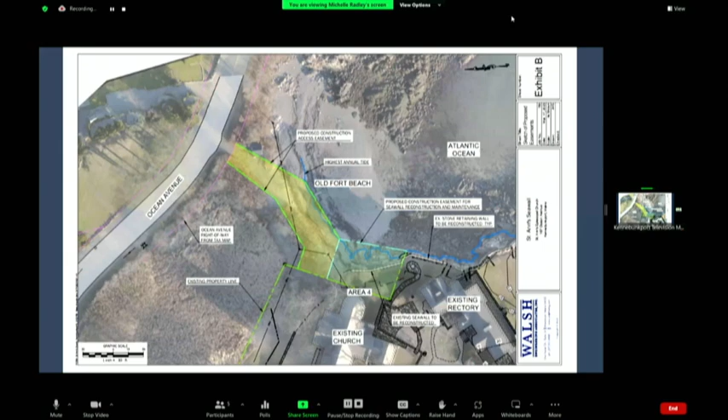This green line represents the property line that's there. So that's where the wall is forward of that as we're looking at this, and you can see where that bisects the wall on the left, and then it circles around the back of the church. I suspect when they built this, they probably didn't know where the property lines were, and they built it to protect the church, or the backside of the church.

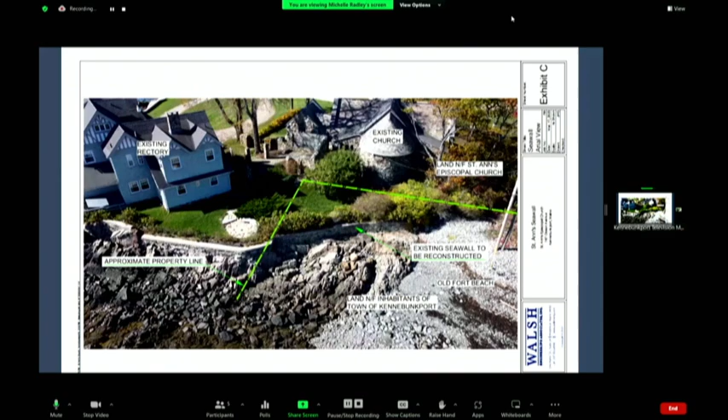This is the wall. The rectory is in the upper left of the picture, and the wall extends to the left. The entrance would be off to the left of this photo, so this is a drone image that we took, but you can see that wall.

It's a masonry wall, and I believe it was built off of rocks that they pulled right off the shoreline, and just mortared them together. At some point, a concrete cap was put on it.

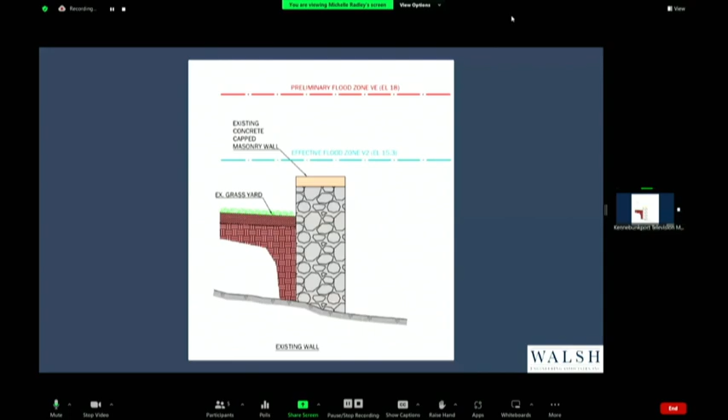Okay, you can go to the next one, please. Yep, one more.

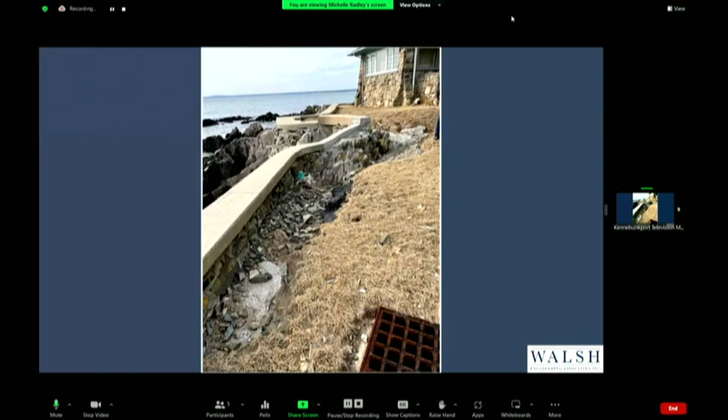There's another one. That's some of the drainage that existed behind that wall. Towards the end of that pipe, there's actually a hole in the wall where it washed out in that storm event. This was just after that storm.

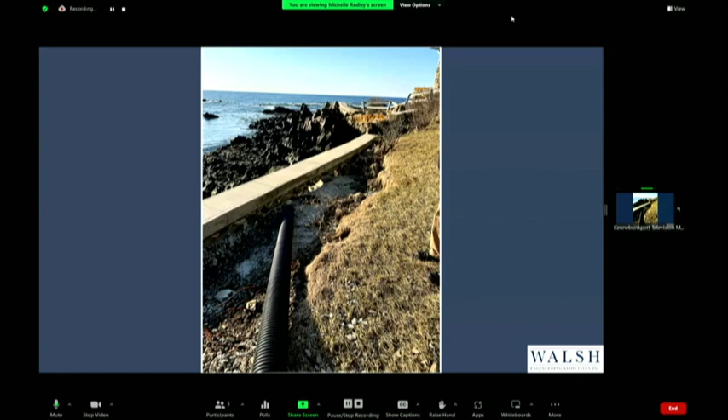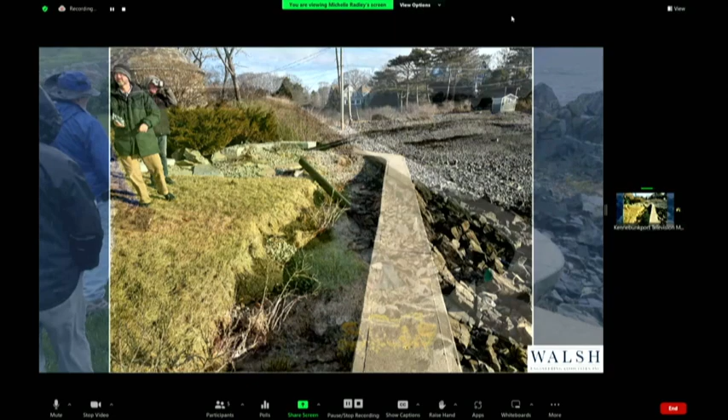And that is the area. The church is just to the left, and you're looking at the beach, but you can see all of the erosion and the pipes that were ripped out as part of this storm. It shows the force of that water as it comes up and over, eroding the backside as well. Some more washout there.

There are a few places where we're likely to put in some riprap to help break the velocities of the water before they hit the wall, primarily around that spot near the rectory, that one corner. There's a very low spot there, and I think it makes sense to put in riprap in those places to help protect the wall even better. The wall will do the protection, but this helps to break the storm up a little bit.

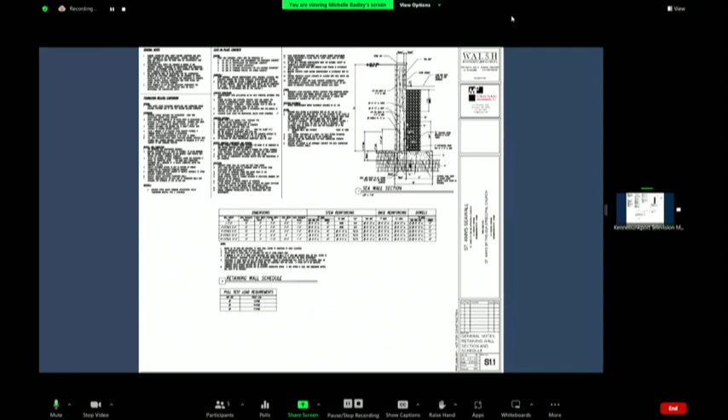The plan on the right represents the same thing, just a little more graphically, but it will have what we call a heel on it, the piece on the back. What we anticipate, and what we've done on other projects, is they get in there, use a hammer, and hammer out the ledge to create a flat base for the footing. That footing is the horizontal piece, and it will be drilled down into the ledge, epoxied into the ledge and held in place that way. The yellow is the concrete core, and there's structural steel in this to make sure it can withstand the velocities and forces beating on this wall.

Go to the next one, please. One more.

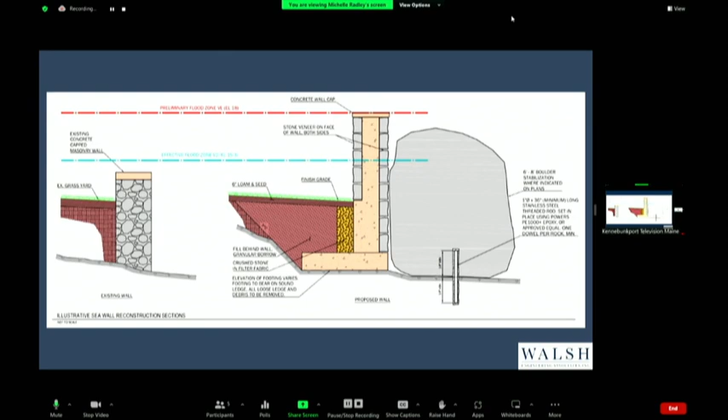There's a balance here, obviously, of views and protection. What occurred to me while watching your video was the effect of wave run-up and overtopping the wall. It seemed to me like if you only raise that wall 3 feet, you're still going to get overtopping for some of those waves. Yeah, absolutely, that's going to happen. And then you have your drain system, exactly, that's the idea.

I mean, we'd have to keep going up, right? Until we'd... Yeah, or you could change the shape, make it convex and reflect it back. But okay, so you thought about that in terms of the drainage system.

So on your riprap, can you characterize that with a D50 rock size? Some of those are gonna be in the 6 to 8 foot range. Well, how about tons, like 2.5 tons? Yeah, whatever that converts to, it's gotta be that. If I was just guessing, I'd guess it needs to be around 2.5 tons average. Okay.

If you go out to the parking area on the right where you drive in, you can see some stones that were put in there at one time, and they've been moved around. You're gonna get a lot of wave action in there, and you can see it on the jetty as well. The stones that went back in were bigger than the ones that were there, in the 6 or 8 foot range.

So could you characterize the riprap in terms of a D50 rock size? Yeah, it's 6 or 8 feet. What tons, weight? I don't know. I don't know that off the top of my head, but I'll get that for you.

The town property, isn't that on that picture on the upper side where there's less riprap and it's almost not a beach because it's all little stones? Isn't that where water could come up and come in behind? There's a, I don't know if you could bring that one back up, Michelle. Let's see how far it is in here. That's the town's liability.

Maybe about 5, that one works actually. So beyond that you see the church behind, actually it's behind Werner, he's standing there. The church is behind there. It actually drops off behind that. It's kind of a stone berm, I'll call it, and a marsh behind it.

So the area it will go is there, which is to the side of the church versus instead of coming up behind. The grade is higher back here where Werner's standing, so it's going to go that way before it comes this way. So the riprap, there won't be a demand on the town or a request? No, I think it'll be very much the same as it is today. It's going to be just the same. Thank you, yeah, taller, absolutely.

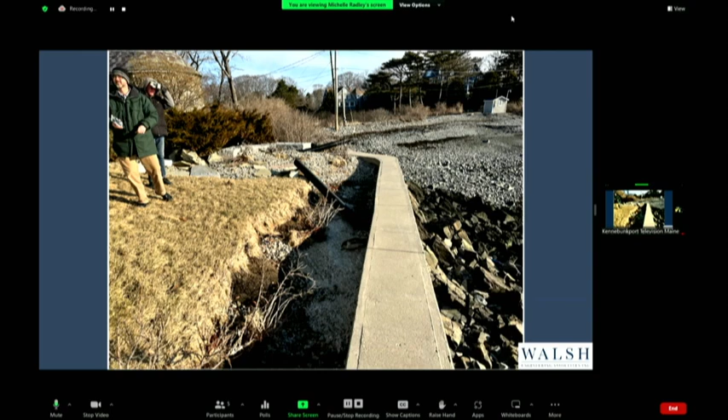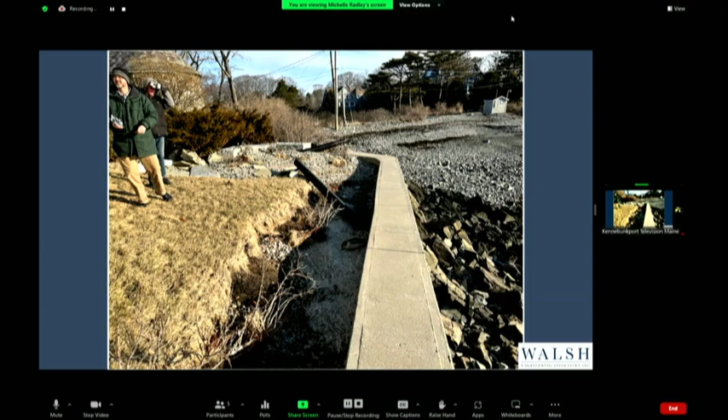Ed, do you have anything? Yeah, I was hoping to understand, just for my own edification, how you attack this problem. I'm envisioning back in the day when this was built, there was an awful lot of work, men on the ocean side, working with mortar. Do you know? I can envision bringing in heavy equipment up to it from the church side. What do you do on the outside, especially where it drops off quickly? What do you envision doing there? And how do you protect the ocean during construction?

So it will all be from the land side. We'll be working on land. What will happen is they'll bring in backhoes with hammers, we call them hydraulic hammers, and those will do the removal first, chipping away at the ledge. So you've got this 60-foot section, and now I got that cleared.

You're going to cart that away, I imagine? Yes, exactly. And then they'll build a flat platform over that 60 feet, it may be several, like they might have 20 feet at this elevation, they might step up a foot, but all toward the church side of the property? Yep. And then it just drops off. So one of the ways that you protect the area is by keeping it small, so that you can protect it.

I'll bring a picture maybe next time and show you some of these large sandbags. We did it down at the Big House on Parsons Beach, we did a wall down there. They use these large sandbags, when I say large they have to be picked up by a piece of equipment, they're this high. You're thinking 3 feet by backhoe or something of that nature? Exactly, they have straps on them, and they pick them up and place them, and you can create a wall out of that.

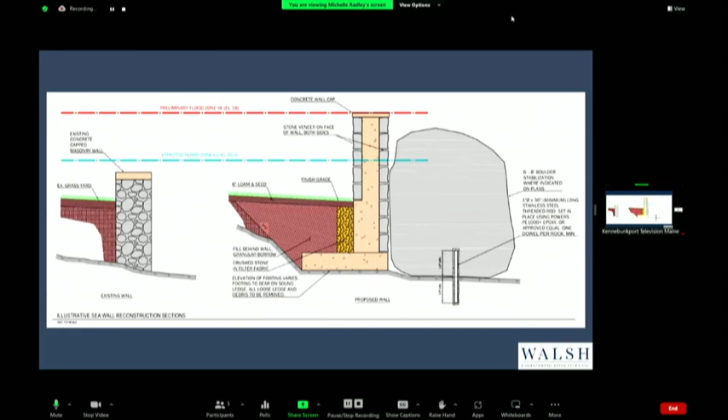So can we bring up the chart that was up there just before that you were looking at? One second. So that one's fine too. Oh, you don't want that? No, you had one of those first two that you had just a second ago. Keep going, that one's fine.

We're up probably high enough in that position, so the ledge is coming up where the wall turns. Maybe you don't have to do that - right, you don't have to do it exactly. You're sort of picking your places, if you will. And again, it takes a good contractor, it takes somebody who understands working around this environment and knowing how to do it. It's tricky work, and you're always worried about protecting both the land behind it and also the rectory.

We open up a hole here and get one of these nor'easters that come in, it's gonna be a challenge. But we're also worried about protecting the ocean, right? If this was a subdivision, we'd be talking about hay bales on the outside, against a petroleum spill - or what do you do here? All the soil's gonna be peeled back, you're gonna be on ledge. If you have a fuel spill from some of this heavy equipment, is it gonna go right into the ocean? Is there any protection that's being given? We can do a little bit, but I can tell you it's pretty challenging.

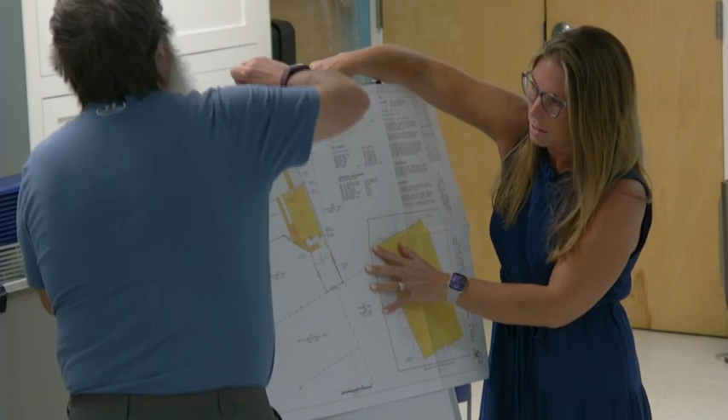Thank you. Okay Dad, okay. I contracted with Paul Gadboy to do a civil survey for the property so I could figure out what I could do. He also shot the house, all the elevations of the existing house, which came to affect the follow-up design of the house. So that first drawing shows the existing piece of property and the existing house on the property. And then the bigger scale drawing on the right depicts the size of the house versus the coverage of the lot.

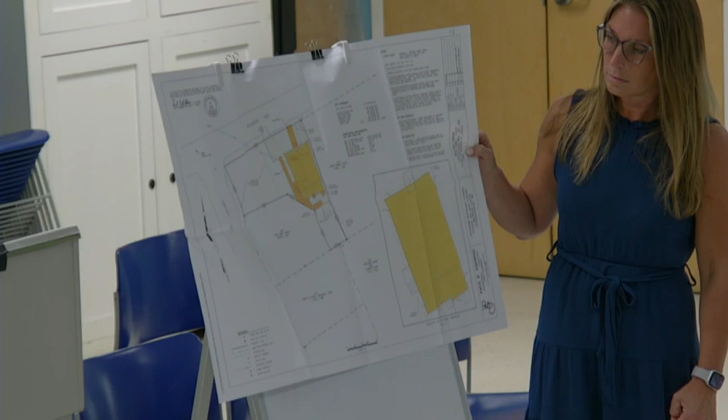Initially, the existing house had 15-inch overhangs on both sides. So when I got in touch with the designer, he said the new house would only have a 10-inch overhang. So I felt I could use that 10 inches to give a little bit of dimension to the Bartlett Street side, meaning the upstairs floor would stick out 10 inches over the bottom floor. So that's what we started out with.

I'm not sure whether I sent those drawings to Werner, but at some point Werner got back to me and said, hey, you gotta be careful, you gotta meet the code requirements. So I forgot what they were, so I went and found that the codes had a coverage of the lot, a square footage increase, and a volume increase.

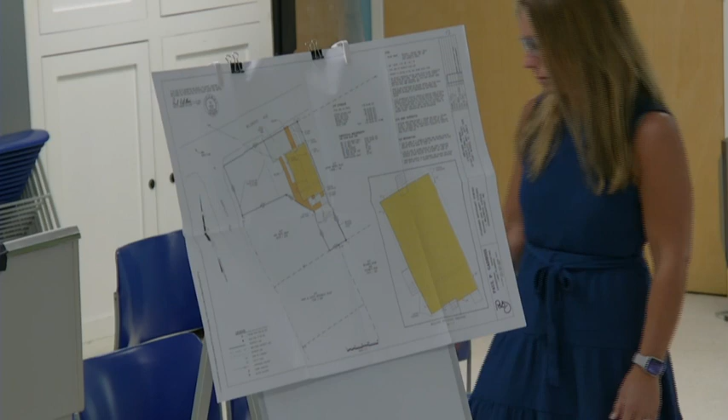So the coverage of the lot, we stayed under the existing coverage. The square footage of the addition stayed way under it, it was only like a 15% increase. When it got to the volume, what I didn't realize is the existing house had 7-foot 2-inch ceilings, so the new house is 8 foot. So I lost like 20 inches of volume just because the two houses are different heights.

So when Paul and I went back to figure out what we could do, we had to take that 10-inch distance off the side. We had to bring the roof back down to the existing roof's 5/12 pitch. And to really get underneath the 30%, I had to take 3 inches off the length of the house, so the house is only 39 feet 9 inches. And that got me just under the 30% volume increase. So that's where we stand.

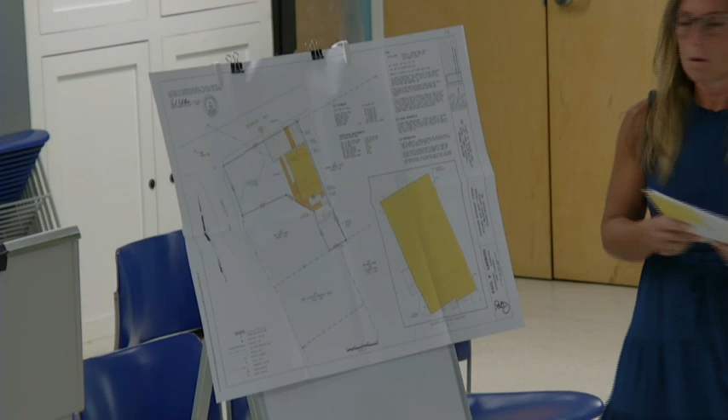Okay. And the need for the new house is... Otherwise your dad can't hear you. Yeah, I can hear her. Okay, I can hear her.

There is a need for the new house to be built so that the living quarters can be on the main floor for wheelchair accessibility. We've owned that house for 40 years, and this is the first year I haven't been able to get up to enjoy the beach because I'm in a wheelchair, and that existing house cannot accommodate a wheelchair at all. So what I tried to do is design the house so the first floor would be ADA accessible so I could get into it, and the second floor would be bedrooms and bathrooms for guests. So that's where we are right now.

I know those sketches are a little crude, but I didn't get back the finished drawings yet from Nate Gino, who was the designer. But they do reflect what the house has to look like. The Bartlett Street wall goes straight up. The two floors are 8-foot ceilings, and the back of the house had to shrink 3 inches to meet the volume requirement. And there's a little storage shed out in the back for beach chairs and a couple of bikes. So that's where we are right now.

I tried to use the existing foundation footprint. I know it's non-conforming, but the other issue I have is on the piece of property there's a covenant that doesn't allow me to build anything within 50 feet of the Bartlett property lines. So it really hinders my ability to do anything with the house. I felt the best thing to do is just keep it on the exact same footprint, and it doesn't change the character of the neighborhood because it's in the same spot. So that's why it's where it is.

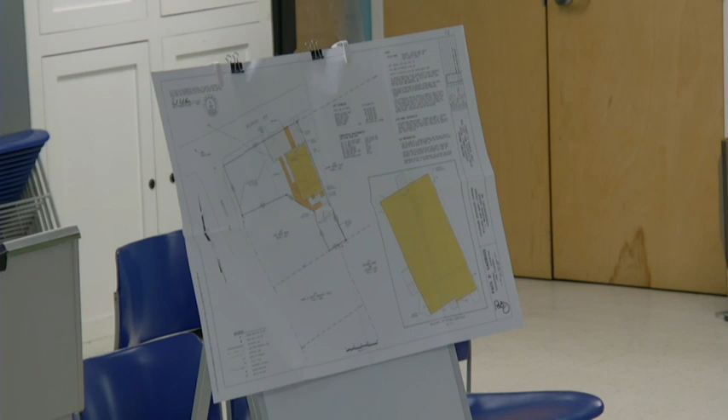So I saw somewhere in here about getting rid of the septic tank. Yes, getting rid of it. Behind the house there's a big round concrete cover. We think it's the top to a septic tank that was used before they put in the sewer system, and I don't know whether they actually went back in and filled it. So what I'd like to do is when we take out the existing foundation and start excavating for the new one, I can take that cover off. And if it needs to be backfilled, I've got all of that leach field property, the dirt that can go into that tank and fill it up, and then just put a cover over it again, completely cover it over.

That sounds like an old cesspool. Yeah, yes. Is there any problems with doing that? I don't see any, seems like a good idea. Yeah, the leach field I want to take out as well, and bring it down to grade. I just have a slight slope towards the street so that the rain will drain towards the storm drain on the other side of the street. Have you talked to Werner about draining onto the street? Yes, he has. Werner was in agreement that it would be great to take that leach field out, so I think that's one of the things I would do.